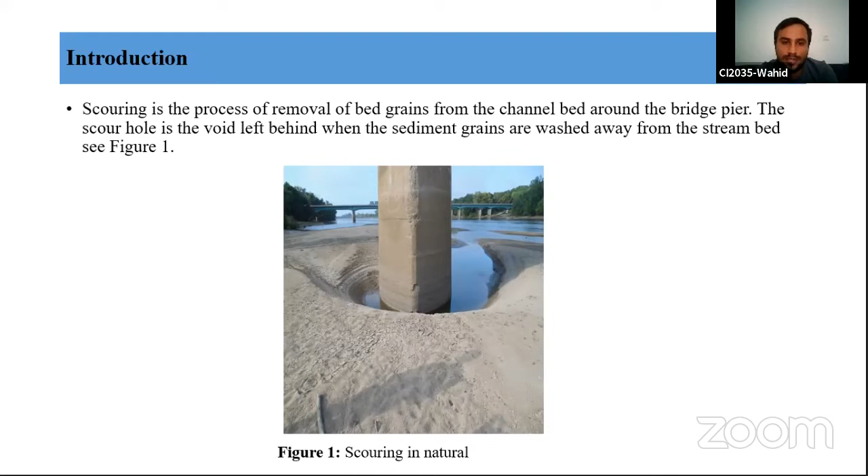Regarding the importance of scouring in civil engineering, according to Wardhana and Hadipriono in 2003, scouring is the most important cause of bridge failure in the United States of America. They state that 52.88% of bridge collapses are due to scouring, while earthquakes caused 3.38% of bridge failures.

In China, between 2007 and 2015, 40% of bridges failed because of local scouring. In New Zealand and Portugal, several cases of bridge failure were reported. In Turkey there are also some bridge failures, and bridge failure costs millions of dollars each year for renewal and reinstatement. The USA Federal Highway Administration claimed in 1978 that the failure of bridges and highways resulting from flood events

between 1964 and 1972 cost $100 million per event. The same occurs in other countries. Regarding bridge failure in Afghanistan, we know that bridge failures occur in developed countries as well, such as America, Turkey, China, and Portugal - in every country. And if we think about new developing countries, most of the bridges there fail as well.

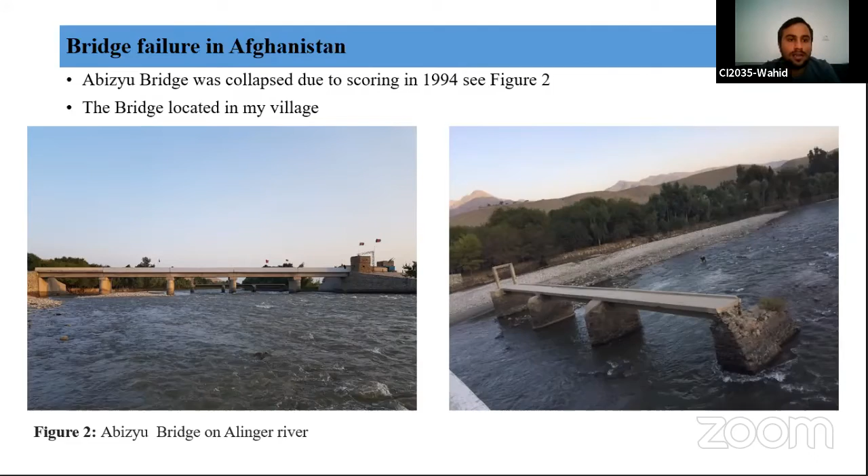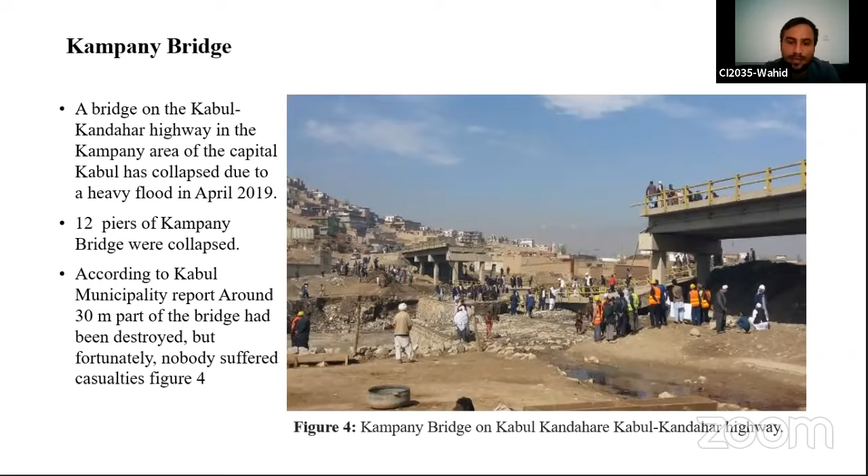Figure 1 shows a bridge in Laghman, Afghanistan, connected to a transportation network to another city, Jalalabad, Afghanistan. I saw that bridge myself.

That river is called Alishang River, which local people call the crease river. Let me talk about the properties of the river. It is so different from others; sometimes the flow is so high, coming much faster than other rivers.

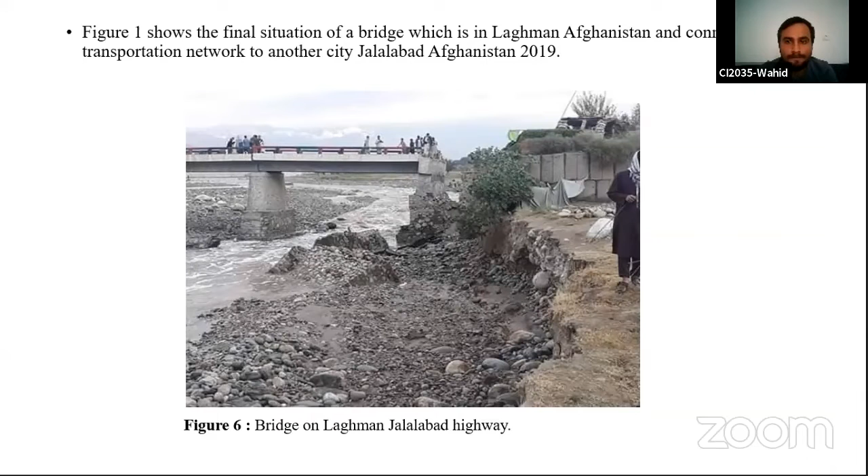This is the bridge in Kuner City. As we can see from the figure, the water removed the sediment around the bridge foundation, and that failure is called scouring. This is a newly built bridge, but the water removed the sediment, and the bridge is now under risk. The Ministry of Transportation claimed they are planning to rebuild or reconstruct that bridge. That bridge is over the Kunar River.

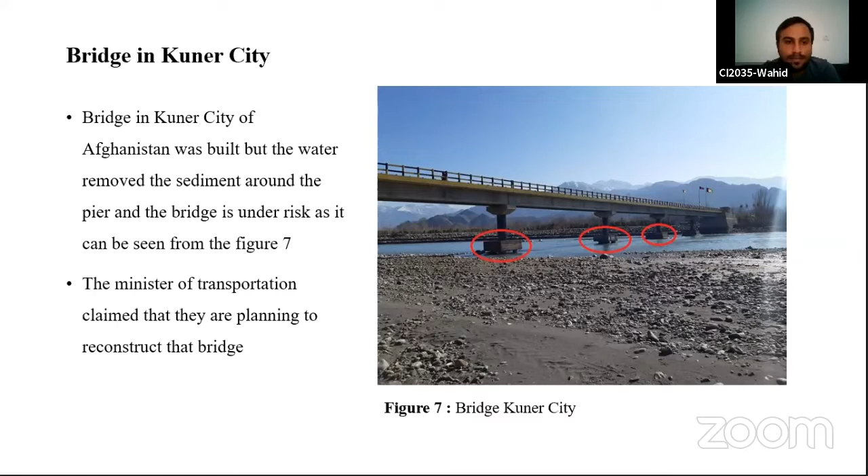In August 2020, the flood rate increased to a level more than usual. You can see the depth, which removed sediment entering from upstream due to the cross-sectional area of the bridge. Trees and sediment got stuck in the bridge and led the water to flow over the bridge, as we can see in the picture.

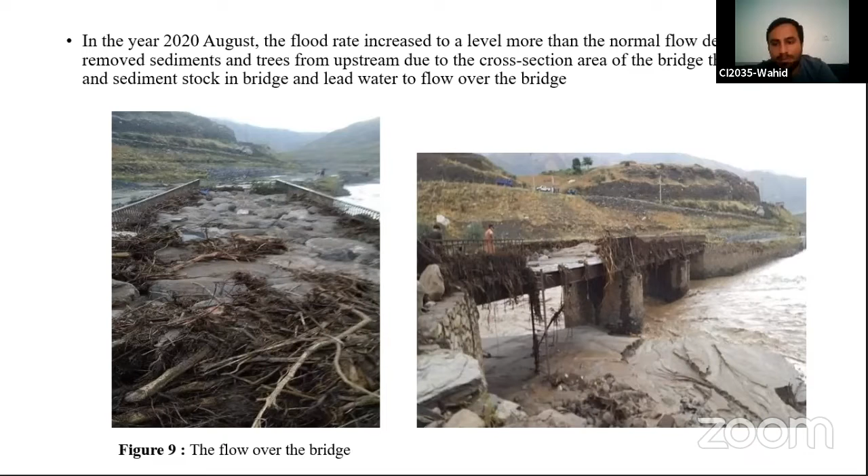The affected parameters on scouring: there are many affected parameters which affect scouring, and most of them are mentioned in this study, such as mean flow velocity, critical flow velocity, approach flow depth, flow intensity and viscosity, bed material, pier geometry, diameter, and time as well.

There are some existing equations in the literature which researchers have developed, but there are two types of equations: one is time-dependent and the other is time-independent. Laursen in 1958 investigated a relation to calculate the maximum scour depth for clear water conditions.

The equation is given below, where H is the flow depth and B is the pier diameter. Hancu investigated an equation to calculate the final scour depth, where FR is the Froude number. Jain and Fischer studied the maximum scour depth for a large Froude number in the laboratory and investigated the following equation. And Citale proposed an equilibrium scour depth equation for clear water conditions, and the equation is here.

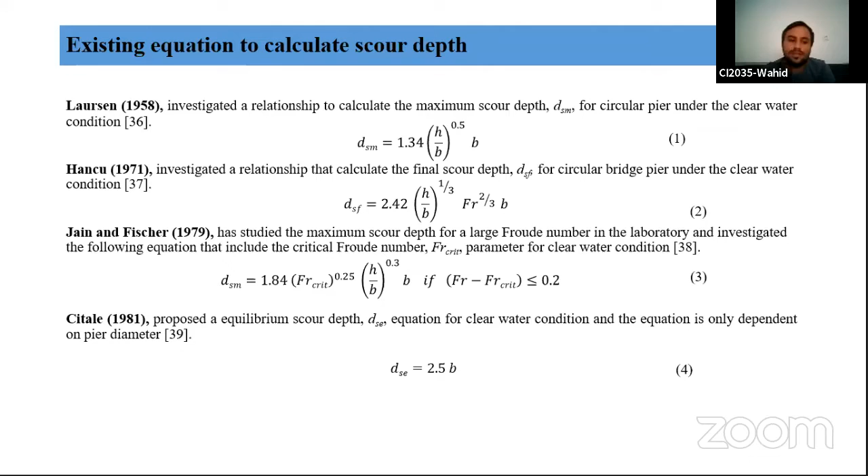Lanza suggests the following upper bounded predictor for equilibrium scour depth. Now for time-dependent equations, Franzetti et al. — these are the time-dependent equations.

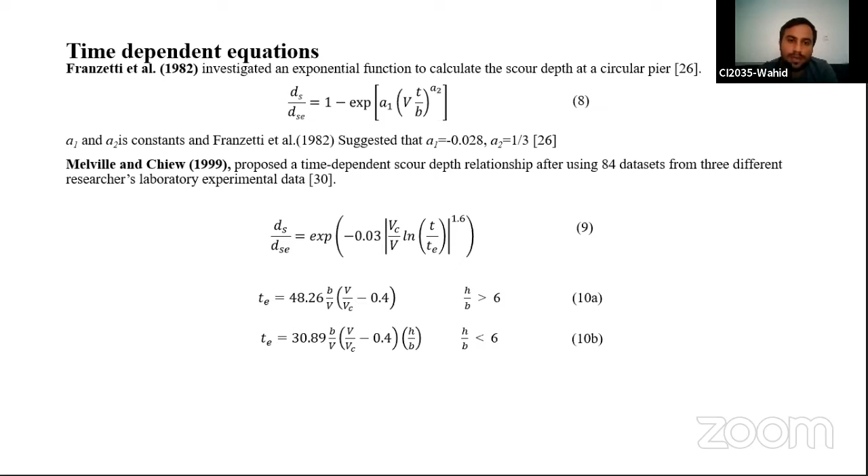Franzetti et al. investigated an exponential function to calculate the scour depth at a circular pier. Melville and Chiew also investigated an equation, and another equation to calculate the time to equilibrium, as we can see in the figure in the slide.

In conclusion, prevention of bridge foundation failure is the motivation to better understand both the scouring process and the predictions existing in literature. Under-prediction of scour depth may lead to bridge failure, while over-prediction usually leads to waste of resources. In Afghanistan, there is a strong need for revision in codal practice for estimation of scour depth. An equation is required for Afghanistan's conditions, which takes various factors into consideration for a robust estimation of the scour depth.

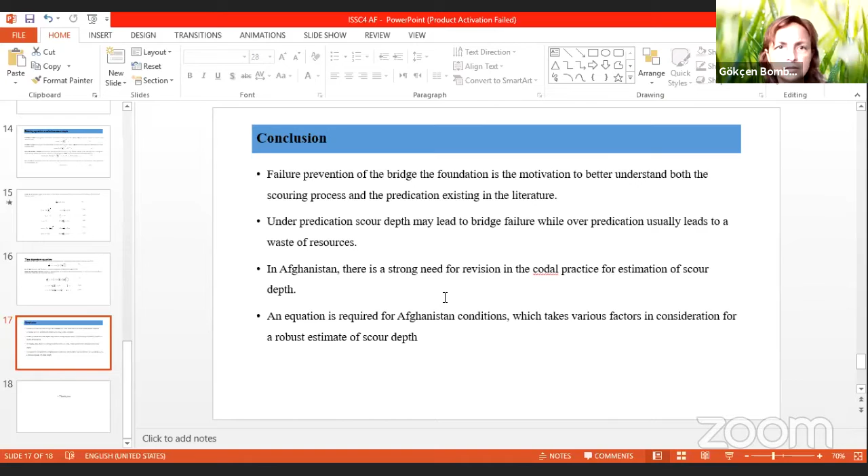Thank you, sir, and thank you to everybody. I have actually two questions. Your voice is not coming through. Can you hear me now? Now it's slow, so slow. Can you speak a little louder, please? Yes, how is it now?

Move from the room so I'm not going to disturb people. Can you tell me, is my voice coming through? I couldn't hear. Yes, your voice is coming. Can you repeat your question?

What is the main contribution of this work in science and technology? Because this is a big problem. From statistics, we have in the United States about 52% of collapsing bridges, and in other countries about 40%. That is a high amount of collapsing bridges due to scour. So if you could propose some solution to that in this work, it would be better, because what I've been seeing in this presentation is that you were just presenting the situation that already exists. We would like you to present something like what you propose as a solution to overcome this problem.

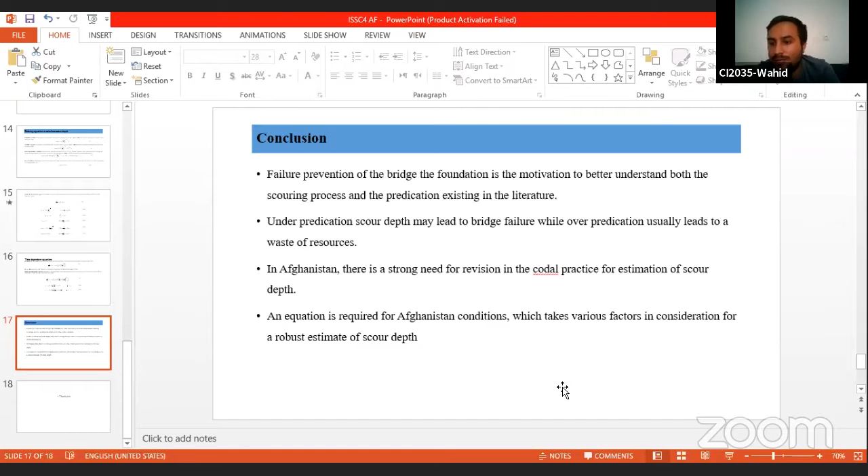For example, in Afghanistan, water or scouring is not the main problem for bridges. I will show you one bridge, located in my village, which the government newly developed, and after that it collapsed due to a bomb attack as well. So that is also a problem. To develop an equation, we need to do experimental work to find a solution, and most equations in the literature are used newly, but rivers are different. The properties of rivers for each country are different. In Afghanistan, no one has done work about this, but we are planning to do something and invent a new equation for that bridge.

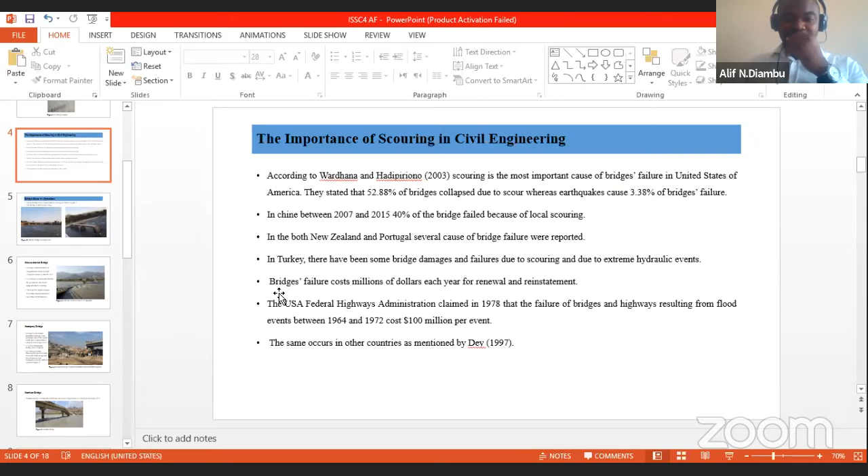Okay, thank you. I'd like to ask the second question quickly. If it depends on rivers, water is water and water is everywhere. Why should the equation depend on countries or rivers?

Yes, okay, we already have equations existing that other people made, but let me explain why you should use a new equation for that. The bed material and sediment characteristics are different. For example, for every country there is a different river, different sediment, different velocities, and also the pier geometry. In every country we can use one pier geometry, but the bed material and sediment are not the same. Also the viscosity effect, but not as much as the pier diameter—there are many factors in the river. One of my teachers, Cardoso, said that people go to the sky, but no one knows how to control the river. The river is something different. Many engineers have worked on that, but no one controls it. They only have some estimation.

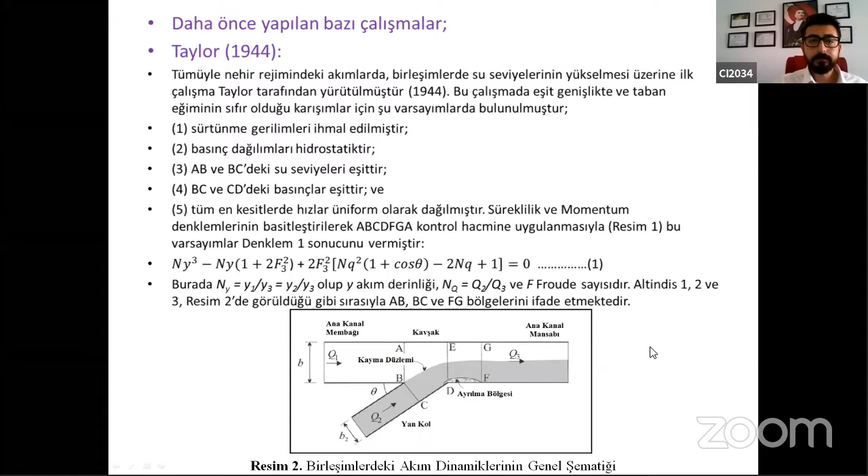Burada elde edilen sonuca göre Taylor 45 derece açıyla yapıyor zaten burada. Kuramsal modelin kendi varsayımını doğruluyor buradaki sonuca göre.

Daha sonra farklı çalışmalar da yapılıyor. Weber'in yapmış olduğu çalışma 30, 60 ve 90 derecelik açılarla çalışmalar yapıyor. Best 84 yılında, Hager 87'de ayrılma bölgelerinin etkilerini ortaya çıkarıyor. Daha sonra Biron, Best, Roy 66 yılında kanal tabanındaki uyumsuzluklar üzerine çalışmalar yapıyor.

Taylor tarafından tatbik edilen varsayımlara göre akım derinliği; Gurram, Karki, Hager, Huli ve Lee'ye göre onlar da akımların ana karakteristiğini inceliyorlar, Taylor'ın yapmış olduğu çalışmadan sonra.

Burada bir diğer önemli çalışma da Behlke ve Pritchett'in 66 yılında yapmış olduğu çalışma var. Dikdörtgen ve trapez enkesitli kanallarda yapılıyor bu, sel rejiminde yapılıyor, yani Froude sayısının birden büyük olduğu durumlar için. Derece olarak buradaki açıyı 15, 30, 45 olarak değişken veriyor. Taylor 45 derecede yapmıştı, Weber 30, 60, 90 derecelerde yapmıştı, Behlke de 15, 30, 45'te yapıyor.

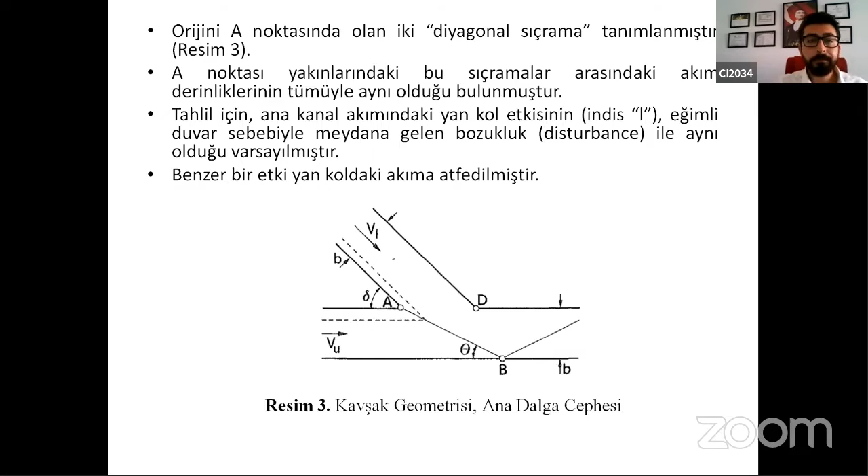Joy ve Thompson'ın 81 yılında yapmış olduğu bir çalışma var. Burada yine 90 derecelik açıya sahip 2 adet kanal üzerinde çalışma yapıyor. Yapmış olduğu çalışmada kinetik enerji akım düzeltme katsayısı olan alfanın, debinin artmasıyla ya da yan kolun genişliğinin azalmasıyla arttığını gözlemliyor. Bu katsayı kanal üzerindeki hız dağılımı üniform olmadığı için kullanılıyor. Joy da bunu kullanıyor.

Best'in 87 yılında yapmış olduğu bir çalışma var. Bu çalışmada ana kanal 0.12 metre, yan kol 0.08 metre genişliğinde. Açıyı 30 derece olarak veriyor Best. Modelini 3.5 metre uzunluğunda, genişliğini 30 santim olarak, devir daim kanalının uzunluğunu da 10 metre olarak veriyor. Uzun tutmasının sebebi akım derinliğini kontrol etmek amacıyla; kavşaktan mansaba yeterli mesafe kalması amacıyla yapıyor bunu.

Bu da Best'in yapmış olduğu çalışmanın görüntüsü. Burada giren debiler Q1 ana kanal debisi, Q2 yan kol debisi, çıkan debi Q3.

Burada belirttiği stagnation zone, yani durgunluk bölgesi; 1 numaralı bölgemiz durgunluk bölgesi. 2 numaralı bölge flow deflection, yani akımın sapması bölgesi. 3. bölgemiz flow separation zone, ayrılma bölgesi. 4. bölgemiz maksimum hıza ulaşan bölge. 5. bölgede artık akımın eski halini alması şeklinde.

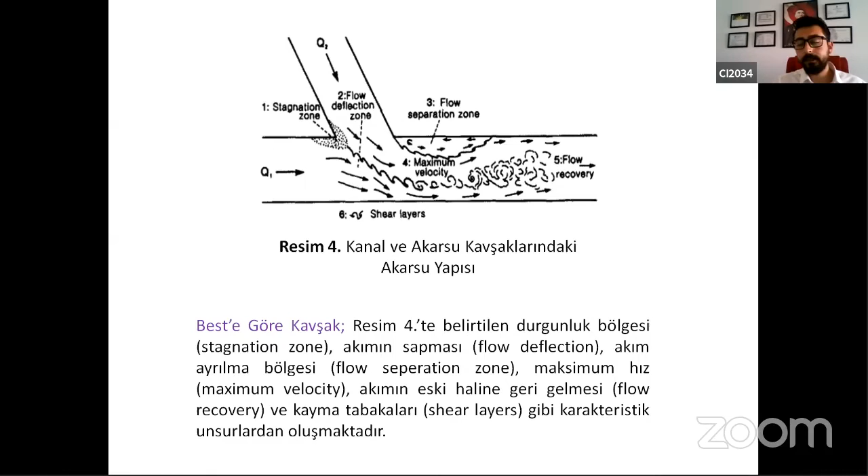Bunları şimdi açıklayacağım. Durgunluk bölgesinde basınç ve akım derinliği bu noktada artıyor, akım ve kayma gerilmesi azalıyor. Daha sonra yan kolla ana kanalın birleştiği bu noktada akım yönünde bir sapma oluyor, çünkü farklı yönlerde gelen akımlar mevcut.

Bu ayrılma bölgesinde kendi etrafında dönen çevrintiler meydana geliyor. Oklardan görebiliyoruz, düşey yöne doğru hızların önemli ölçüde belirginleştiğini görüyoruz. Daha sonra düşey hızlar bir nevi su perdesi oluşturuyor ve ana kanaldaki akımın bu bölgeye girmesini engelliyor.

Böylece karışma noktasının mansabındaki akımın aktığı kesit daha da daralıyor. Bu bölge daralıyor, daraldığı için daha büyük hızlara sebep oluyor; bu bölgede daha büyük hızları görebiliyoruz. Ana kanal ve yan koldaki debinin birleşmesiyle bir hız artışı, debi ve hız artışı meydana geliyor. Kesit daralmada olduğu için kesitsel ortalama hız da artıyor, hızların ve debilerin birleşmesiyle. Ayrıca burada hızların farklılığından dolayı da çevrintiler meydana geliyor.

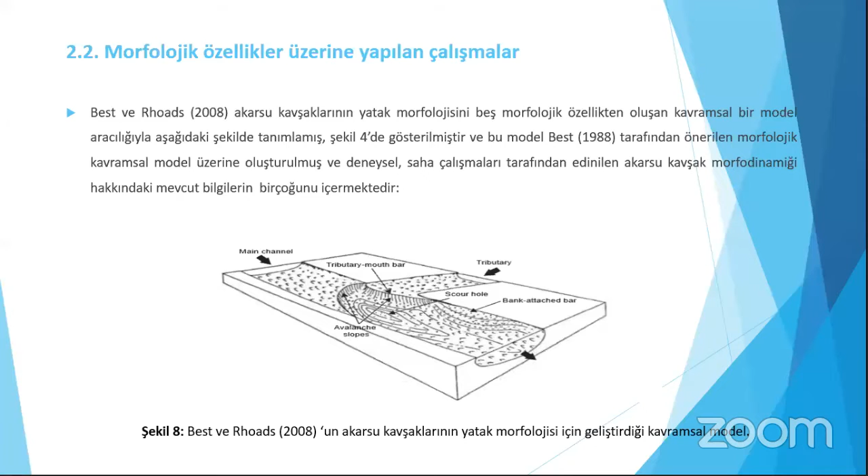Morfolojik özellikler üzerine yapılan çalışmalarda, Best ve Rhoads'un akarsu kavşaklarının yatak morfolojisi 5 morfolojik özellikten oluşan kavramsal bir model aracılığıyla şekil 4'te tanımlanmıştır. Bu model 1988 yılında Best tarafından önerilen morfolojik kavramsal model üzerine oluşturulmuş ve deneysel saha çalışmalarından edinilen akarsu kavşak morfodinamiği hakkındaki mevcut bilgilerin birçoğunu içermektedir.

Best'in 1988 yılındaki morfolojik modeli, 5 kavşak açısı (15, 45, 70, 90 ve 105 derece) ve 3 debi oranı (0.53, 1.02 ve 1.53) test edildiği laboratuvar deneylerine dayanmaktadır. Mosley tarafından yapılan çalışmada ise farklı debi oranları (0.33 ile 1 arasında) ve kavşak açıları (15 ile 90 derece arasında) simetrik ve asimetrik akarsu kavşaklarında test edilmiştir.

Son 2 dakika diyebilir miyiz?

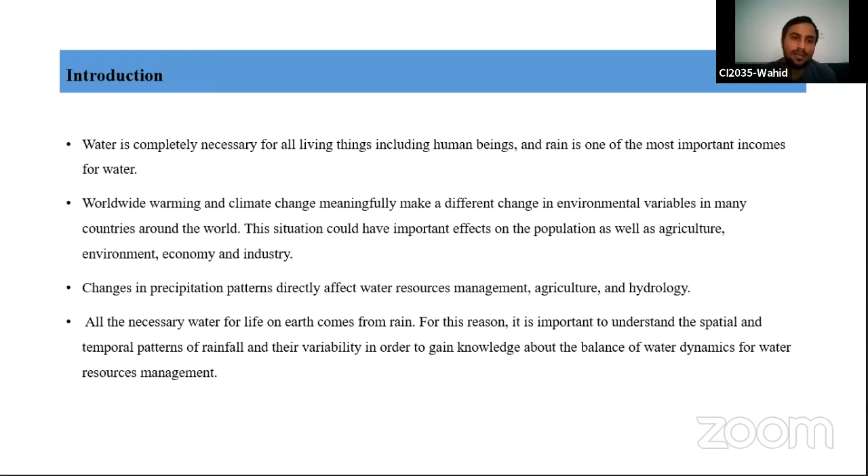As we know, water is really necessary for humans, and rain is one of the most important resources for water, and because of that rain, the climate is also changing. For example, water directly affects humans, agriculture, and industry, in everything. There are many researchers who have worked around the globe and also in Turkey to calculate rainfall and runoff analysis, and also mean temperature. Some of them are foreign and some are Turks, and these are the people who work on that topic. I'm going to go a little bit faster in order to not spend our time.

In study area and data, the data of the daily rainfall and monthly mean air temperature recorded at the Black Sea is used in this study. The name of the gauging station is Hopa and Artvin. Table 1 shows the basic statistics of monthly total rainfall and monthly mean air temperature for the period 1975 to 2006. There is no missing data in all of the rainfall and temperature time series.

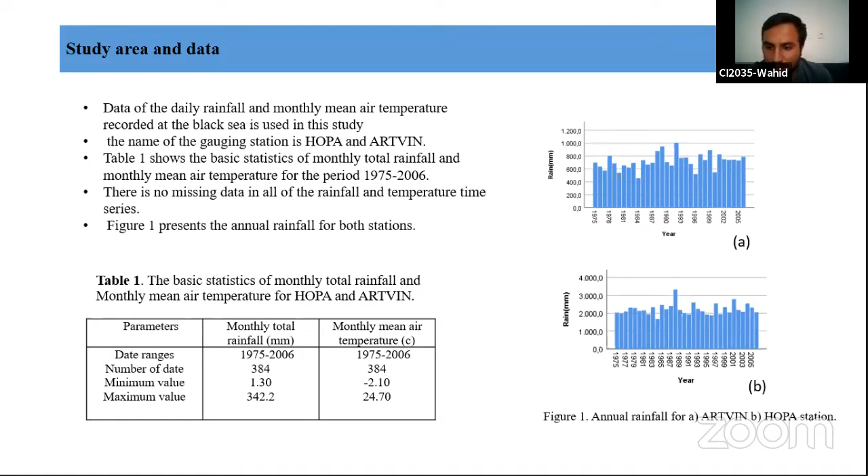From the analysis of temperature data series, it can be decided that the temperature characteristic is changing, especially in Artvin. The change is not that much. In Hopa Station, the temperature is changing continuously over all the years, and there is a decrease in temperature for the last 6 years.

Methodology: in this study, the daily precipitation and mean air temperature data were collected in the Black Sea region. Two meteorological stations were used for a period of 1975 to 2006. Daily precipitation and monthly mean air temperature data were first calculated as monthly and annual values. For the precipitation data set, the seasonal amount was calculated by summing the precipitation quantity from the months.

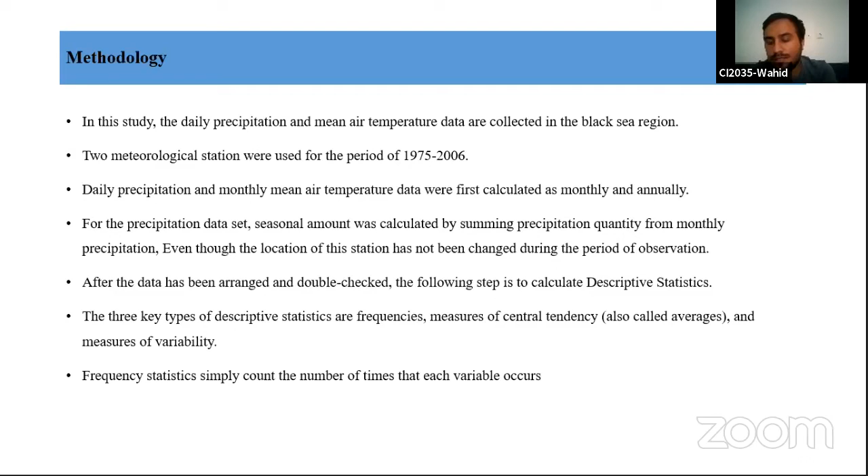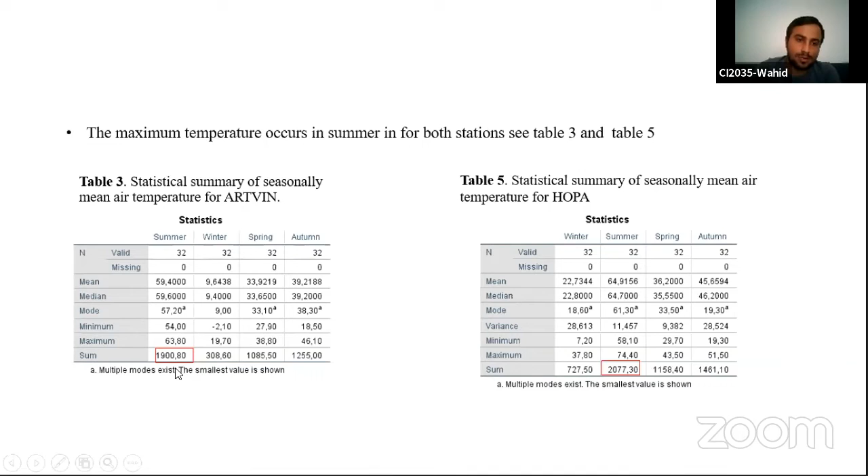In conclusion, in this study, precipitation and temperature data from 1975 to 2006 were used to statistically identify annual and monthly characteristics in the Black Sea region. From the analysis of the annual, seasonal, and monthly rainfall data series, it can be determined that the precipitation characteristics of the area are changing, even though the results of the two different stations differ from each other.

The maximum precipitation occurs in winter, but the maximum temperature occurs in summer, in Artvin station. It's different for the Hopa Station: the maximum precipitation occurs in autumn, but the maximum temperature occurs in summer. Summer, spring, and autumn are the homogeneous seasons in terms of temperature.

From the analysis of the data series, it can be decided that the temperature characteristics of the area are changing. In Hopa Station, the temperature is changing continuously over all the years from 1975 to 2006, and moreover, there is a slight decrease in temperature for the last 6 years.

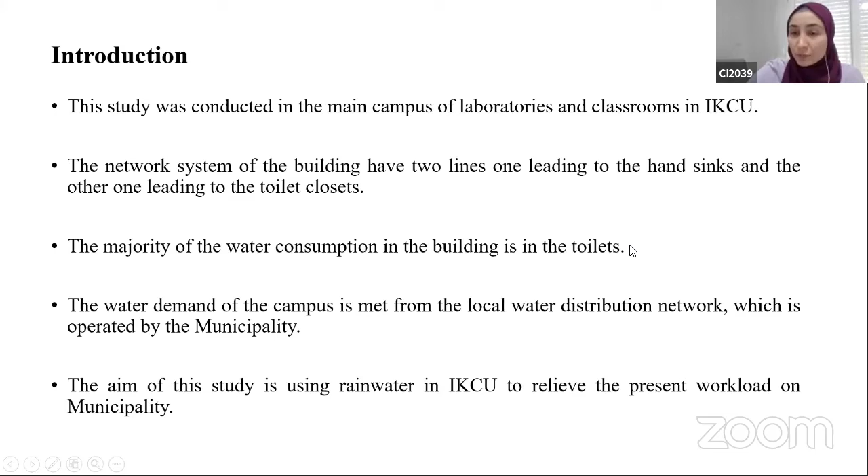By examination, we know most of the water consumption in the building is in the toilets. The water demand of the campus is met from the local water distribution network operated by the municipality. The main aim of this study is using rainwater in İzmir Katip Çelebi to relieve the present workload on the university and municipality.

The methodology of this study: rainwater harvesting potential means the amount that can be effectively harvested. There are some factors affecting the rainwater harvesting potential, like precipitation and rainfall, including quantity and pattern, and catchment area characteristics, meaning the catchment area and the runoff coefficient.

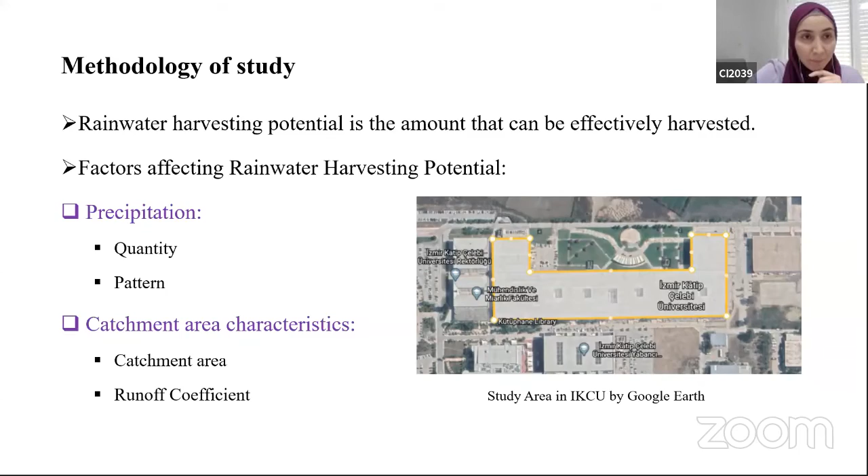This study area is shown on the right side via Google Earth, the studied building in İzmir. For precipitation quantity, according to academic sources, average rainfall that exceeds 300 millimeters is suitable for applying rainwater collection systems, and İzmir has a typical Mediterranean climate.

For the pattern, we mean the number of annual rainy days, because it also influences rainwater harvesting systems. If the dry period is too long, big storage tanks would be needed to store the rainwater. In İzmir, more than 50% of the annual rainfall falls in winter.

For the average monthly rainy days in İzmir, obtained from the sources, the highest is about 12 days in December, and only about one day in July. It's very low, of course.

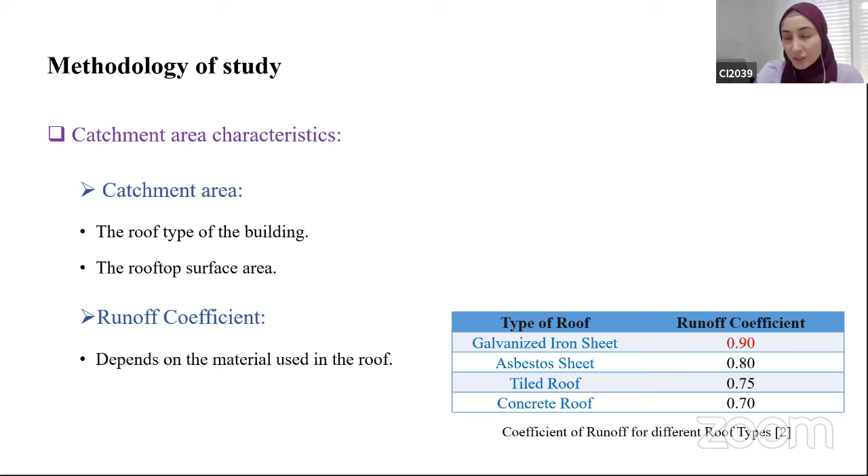Catchment area calculation for our study: the rooftop of the studied building is metal roofing, so the runoff coefficient is 0.9, and the roof type of the studied building is a pitch roof.

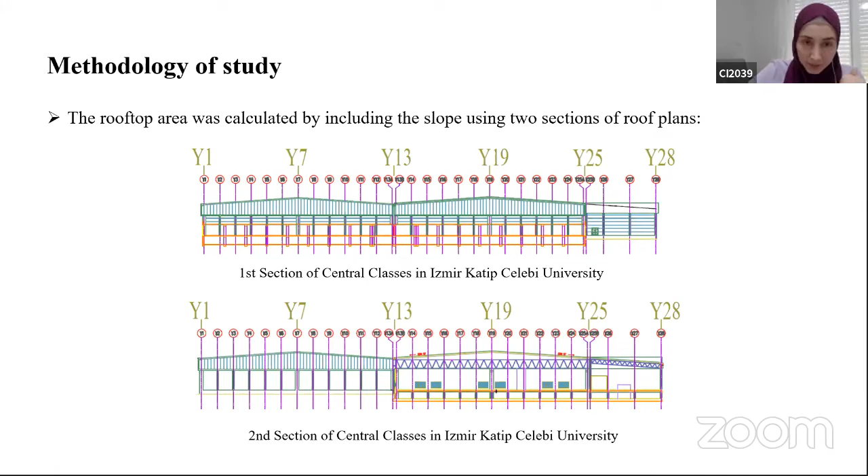If we look at the studied building from the left side and the right side, we can see it is like a lot of triangles on both sides. Mathematically, we can find all the dimensions to get the harvestable rainwater.

For this reason, we first calculated the area of the rooftop of the building for the area used to determine harvestable rainwater.

Now the volume of harvestable rainwater from the rooftop of the campus is calculated using the Gould and Nissen-Petersen formula. This formula gives us the rainwater harvesting potential, which equals multiplying three variables: catchment area in meters squared, as calculated previously, and monthly rainfall in millimeters, which we obtain from meteorology.

And the last one, runoff coefficient, which is 0.9, because our rooftop is metal. By substitution, we can get this volume about

17,000 metric cube. To know the details for this one, we can see this table. In this table, we have, for every month, the catchment area, which we calculated, and the average monthly rainfall, which we got from the meteorology, and the runoff coefficient as to the material of the rooftop of the building.

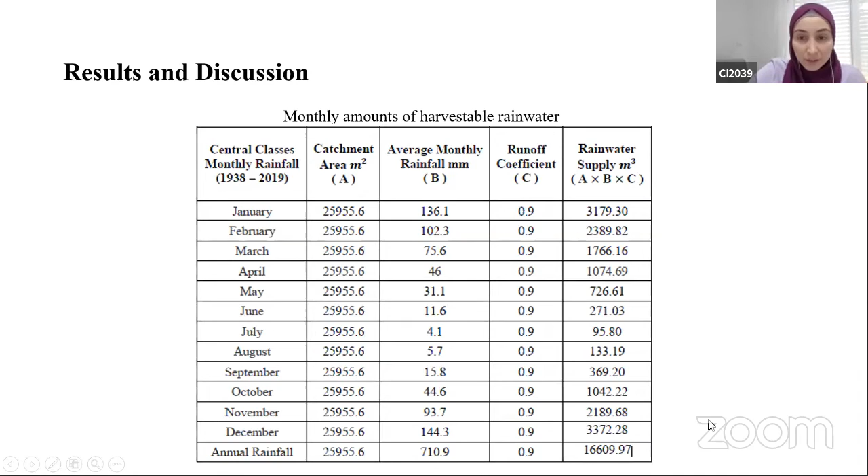For this reason, by the last formula, we can determine the maximum rainwater supply, which we get at about 17,000 metric cubic. As we know, the main uses of water in the universities are only for

non-potable purposes, such as toilet flushing and irrigation. For this reason, no need for any treatment, only simple filtration is enough. According to the data, the amount of harvestable rainwater to be collected may meet the use of water in toilet flushing and also in irrigation, but we can determine that by estimating the water demand, by installing flow meters to

determine exactly the feasibility of utilizing the harvested water. The intended purpose of this study is determining the rainwater harvesting potential in Izmir University. The implementation of these systems in the university will help to contribute to reducing the current pressure on the university budget, utilize the water resources more efficiently by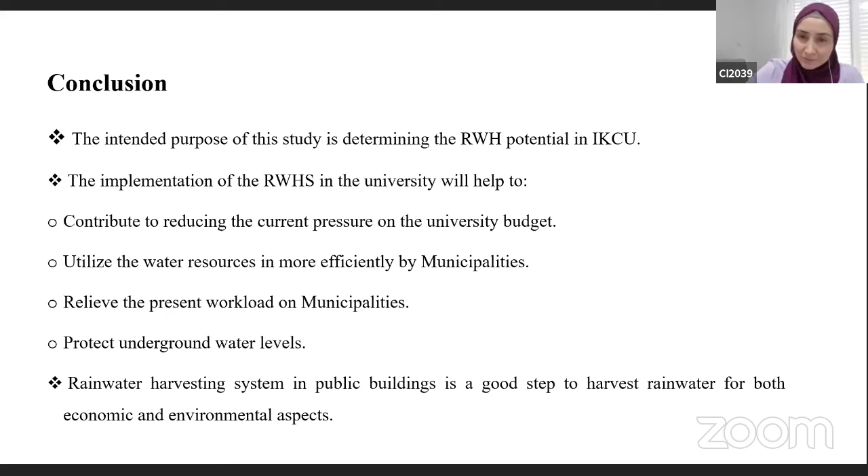municipalities, relieve the present workload on municipalities, and protect underground water levels and large amounts of water. Rainwater harvesting system in public buildings is a good step to harvest rainwater for both economic and environmental aspects. This is my references, and thank you very much.

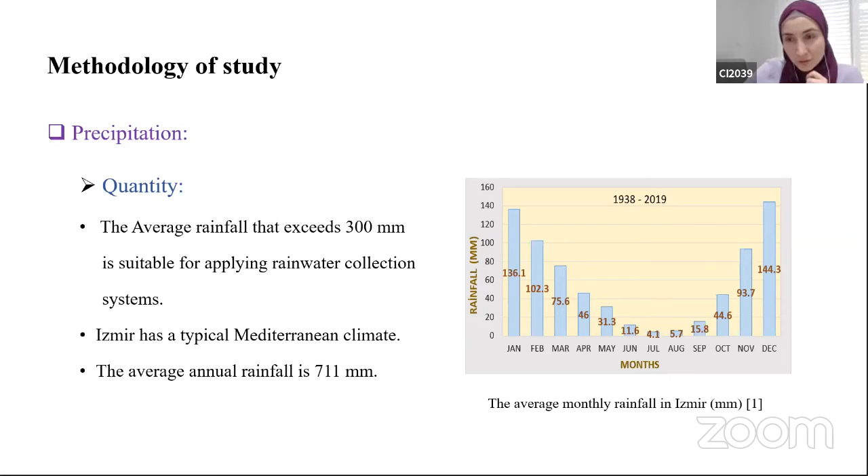This average is only for the December month. No, yes, but I know the average, even for all of them, it's about 700 millimeters. Oh, okay, any question? It's okay. Okay, thank you very much, Alif.

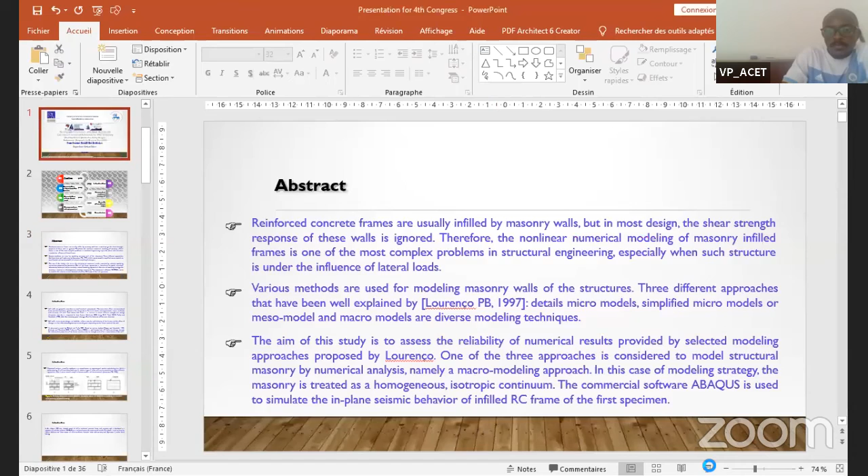Okay. Hello everyone. Thank you for this moment that you give me the opportunity to defend this topic, which is earthquake resilience of infilled reinforced concrete frame with innovative wall solution. So this topic is about the new type of masonry that we're going to find out if it's going to match with the expectation for everybody, because in this

year we have noticed that some of the walls have some problems to sustain the seismic load, because masonry walls were constructed to sustain the vertical load. When it comes to the seismic load, it presents some weaknesses. That's why our topic matches with this area.

So first of all, I'm going to make some description of the experimental test specimens which have been done before. So this topic, my work gets some results from the experimental tests that have been done before. So we use some results to conduct our

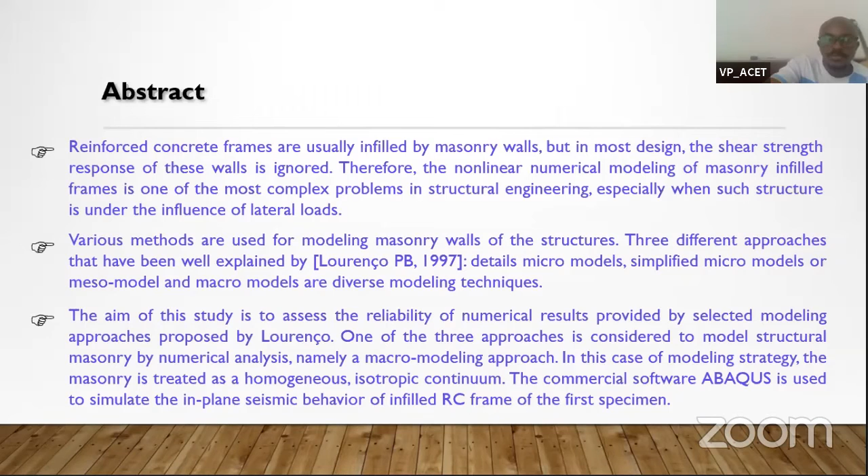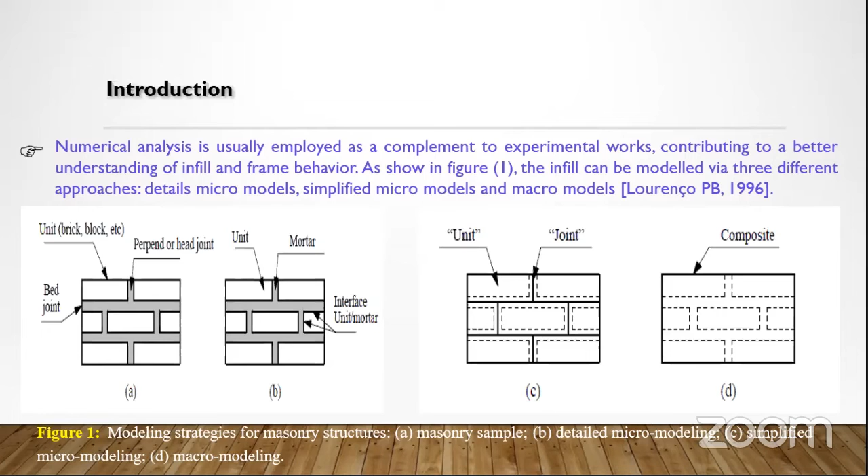This is the type of masonry that Lourenço proposed: the micro model. Here we have a meso model, and here we have a macro model. In the micro model, there is unit and bed joint mortar designed element by element, but in the macro model, all elements are designed together. Let's go to the description of the specimen.

This was the test specimen that was conducted by Monsieur, who I have to underline is my supervisor. He conducted this experimental setup where there was a frame, a concrete frame, with infill wall.

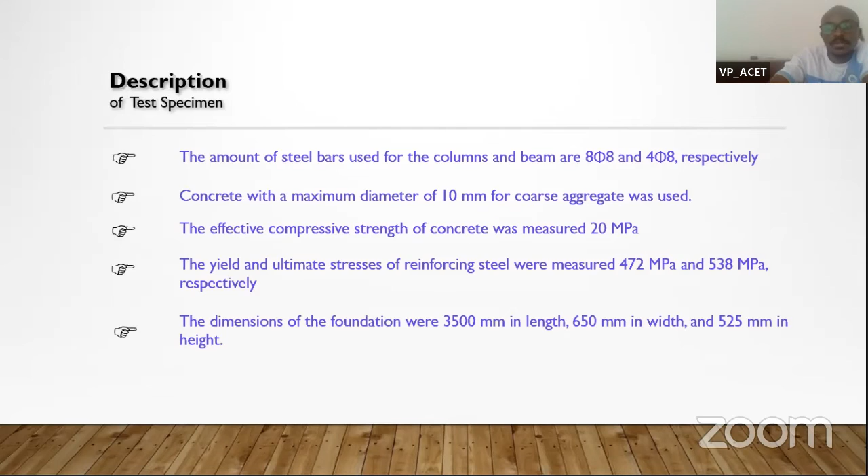This wall is made of standard brick, and as we can see, there are all the parameters included, like the amount of steel bar used for the column and beam, which are 8 and 4 respectively, with concrete with maximum diameter of 10 millimeters. The effective compressive strength of concrete was measured at 20 megapascal. The ultimate stress of reinforced steel was measured at 472 and 538 megapascal. The dimension of the foundation, as we can see here, those are the parameters that have been involved in the experimental campaign.

What was the experimental result? We noticed that for the bare frame, the first crack related to flexure behavior was observed at a drift of 0.28%, where the applied load corresponding to this drift was measured to be 35.8 kilonewton. For the standard brick infill, the first damage was observed when the infill wall separated from the beam at a certain drift level, and the applied load at this drift level was 96.3 kilonewton. The first flexure crack was observed at a drift of 0.34%, with the applied load measured at this drift being 116.2 kilonewton.

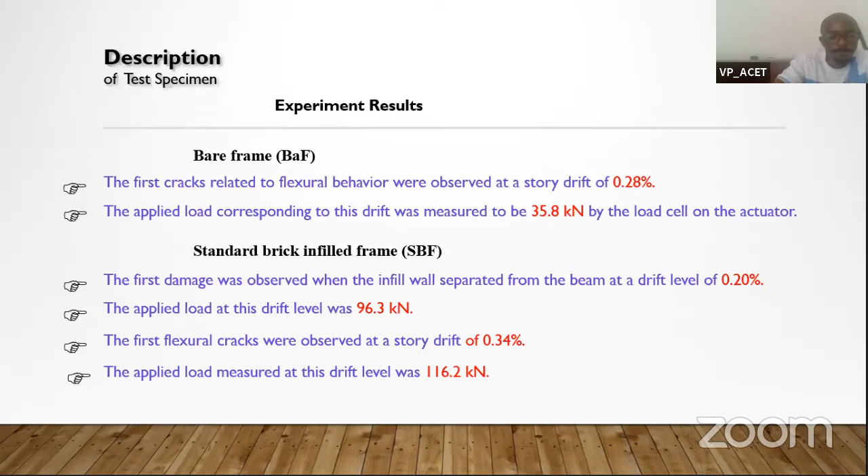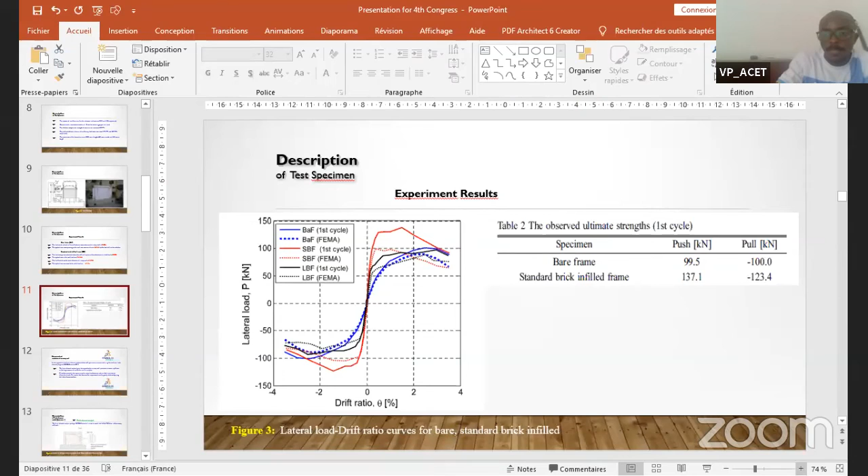Here we have the graph of lateral load versus drift ratio. As we can see from the table, there was the push and the pull for the bare frame and the standard brick infill frame.

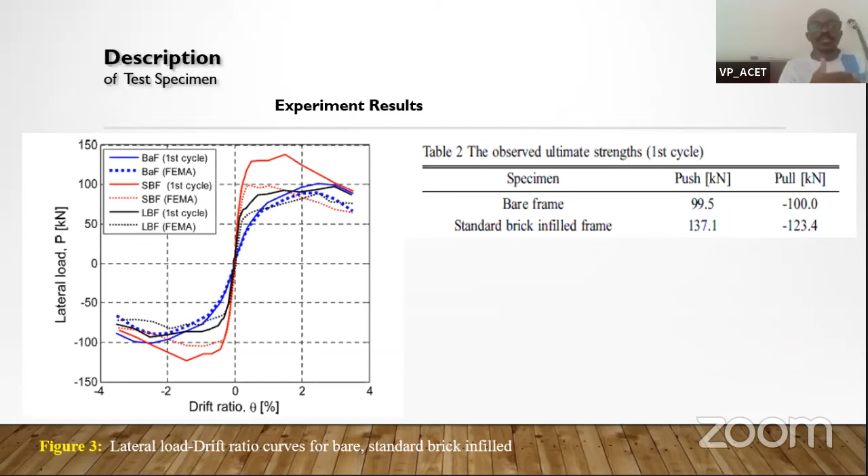So what we're going to do now is compare the experimental result and the analysis. For this, we use Abaqus to conduct our analysis campaign.

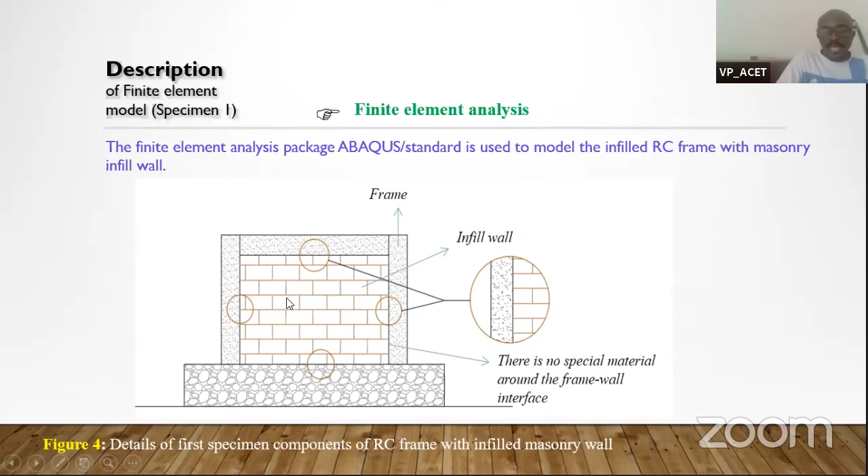Our specimen is constructed as follows: we have a bare reinforced concrete frame and an infill wall made of standard brick, with no special material between the connection of the reinforced frame and the wall. As you can see in the model characterization, we have concrete beam, masonry, and solid elements. All of these elements are designed as one element in Abaqus.

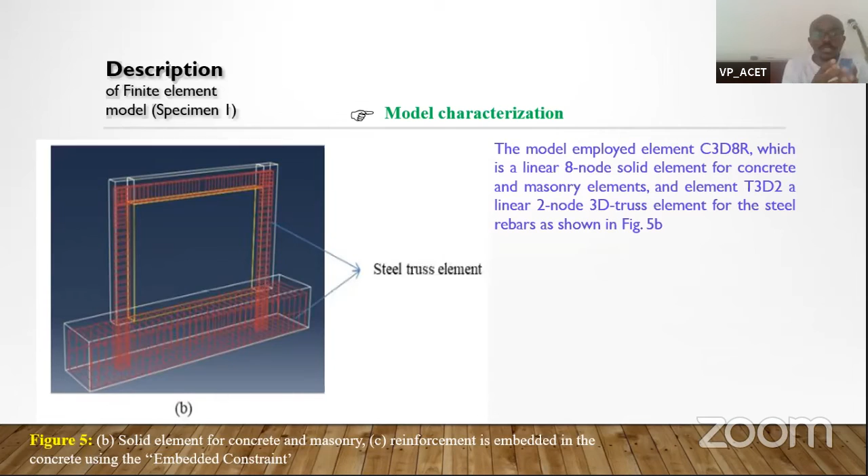In this figure, we got the solid elements for concrete and masonry. These elements are embedded together to allow a good bond between those elements. It's the same in this figure, showing a good connection or bond between all of the elements, like concrete and steel.

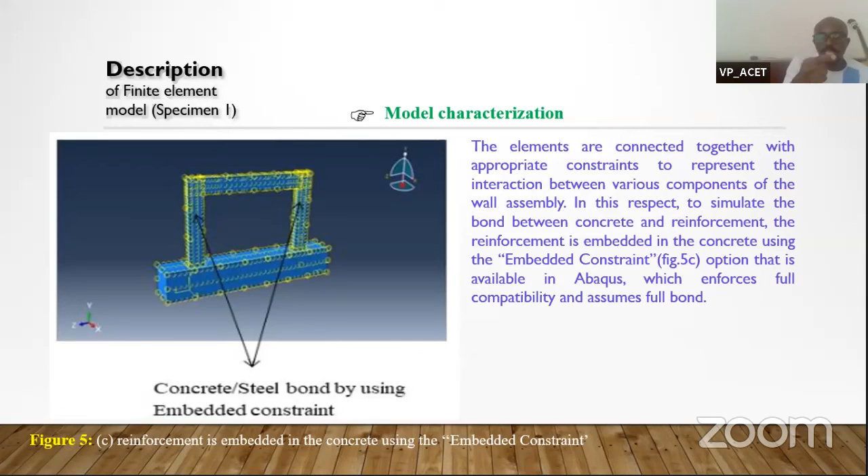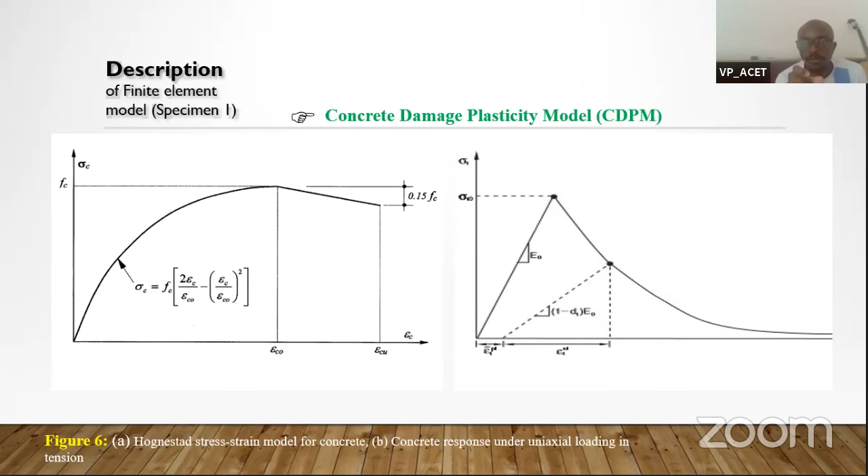So as I underlined before, the interaction between concrete and masonry: there is no special material between them. In Abaqus, we have defined a parameter to maintain that they must not have connection between them. For that we have described hard contacts, and we define a friction coefficient of 0.5.

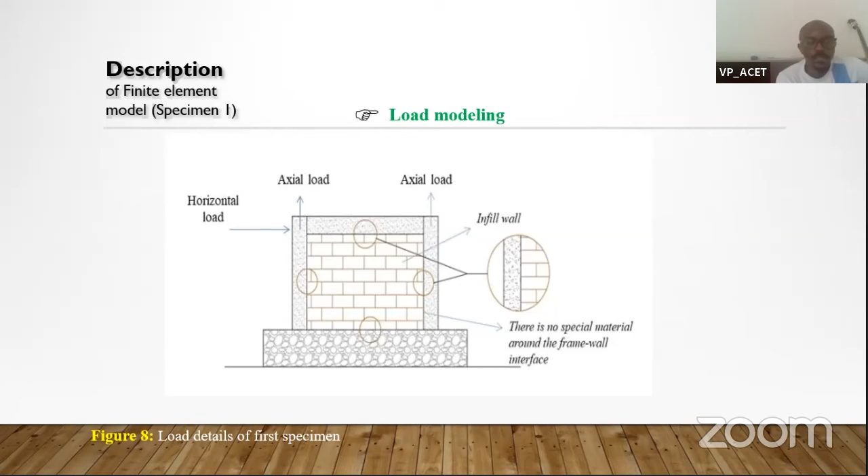For concrete, the Poisson ratio was 0.2, compression strength 20 megapascal, modulus of elasticity, density also. And for reinforcement steel, the Poisson ratio was 0.3, yield stress 472 megapascal, modulus of elasticity 214000 megapascal. All of this material property is taken into account in Abaqus in order to conduct our analysis.

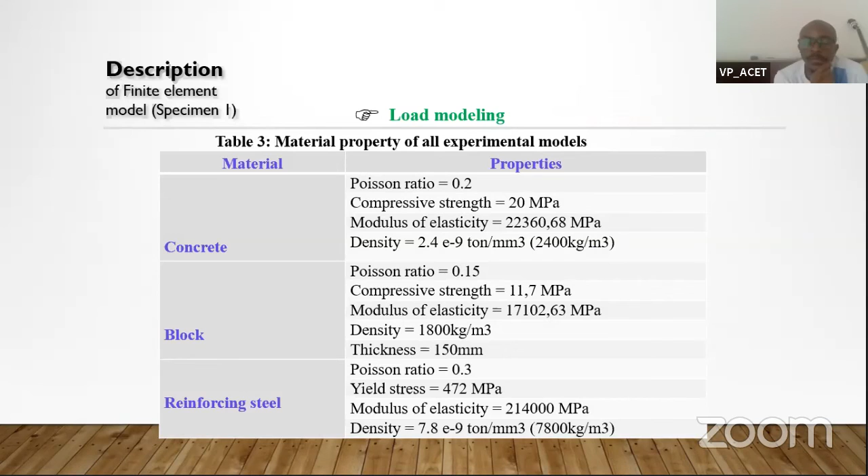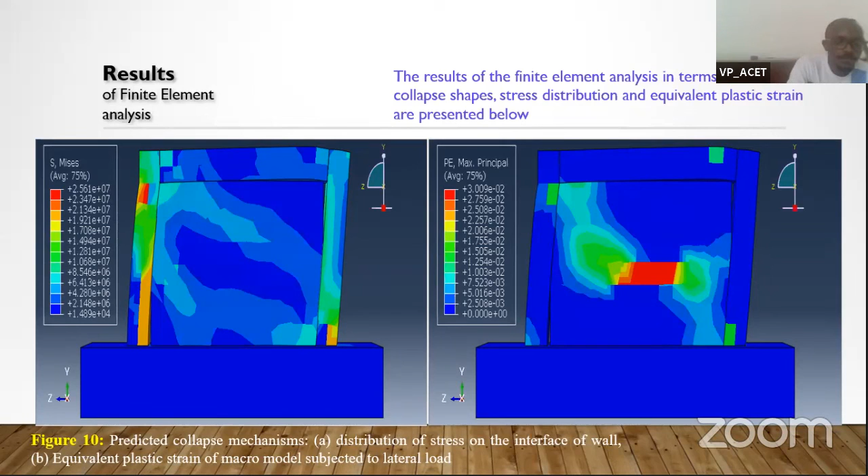In this result, we notice that in the upper left and right corners, the infill detached from the reinforced concrete at a lateral load of 353.64 kilonewton, which corresponds to a drift of 2.2%.

It should be noticed that the failure mode of the numerical model is compatible with the experimental results in terms of damages, because we can see it in the corner here and also here.

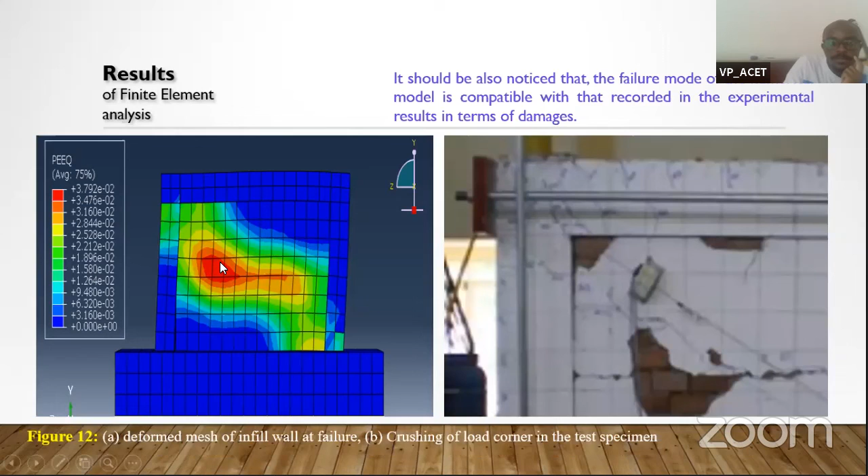In the comparison with the experimental test, when we get to a drift of 1.19% and 1.0% drift ratio, we got the same similarity as shown in the experimental campaign, also in the analysis methodology, in diagonal or horizontal cracking.

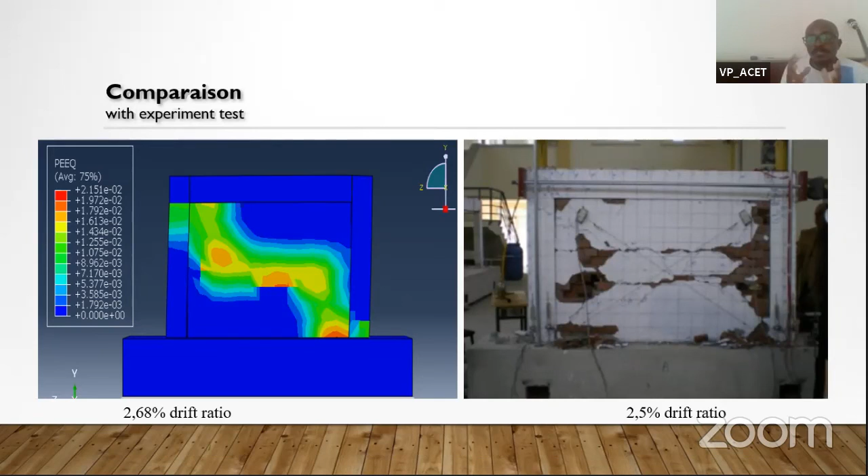Also at a drift of 2.68%, we have this same kind of similarity in terms of damages. It's the same case at a drift of 3.6% and 3.5%. So our expectations in terms of using the software match the expectations in terms of damages.

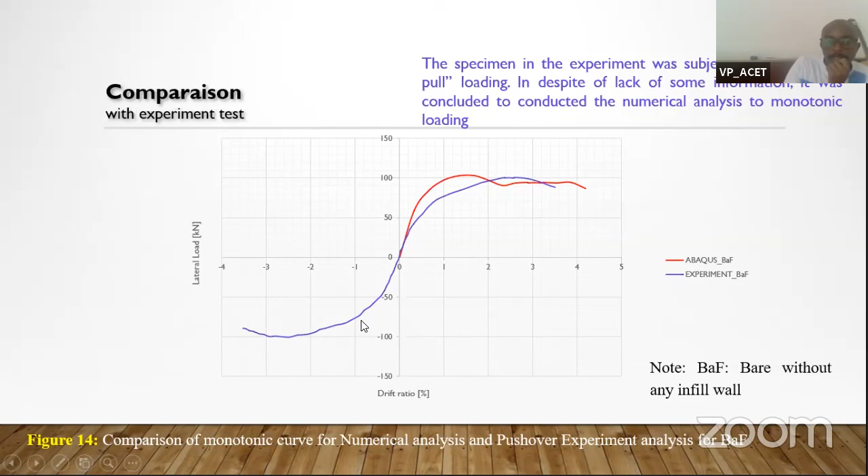So we can see in the graph here, for the BaF, the first crack point. It's similar, almost the same.

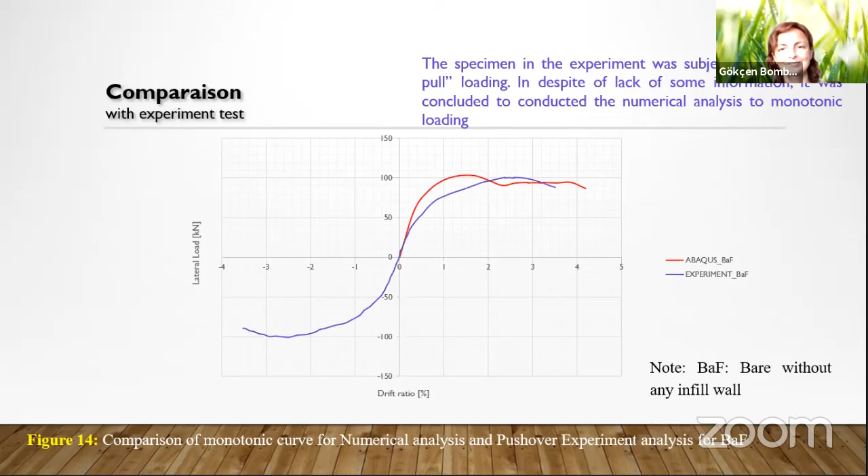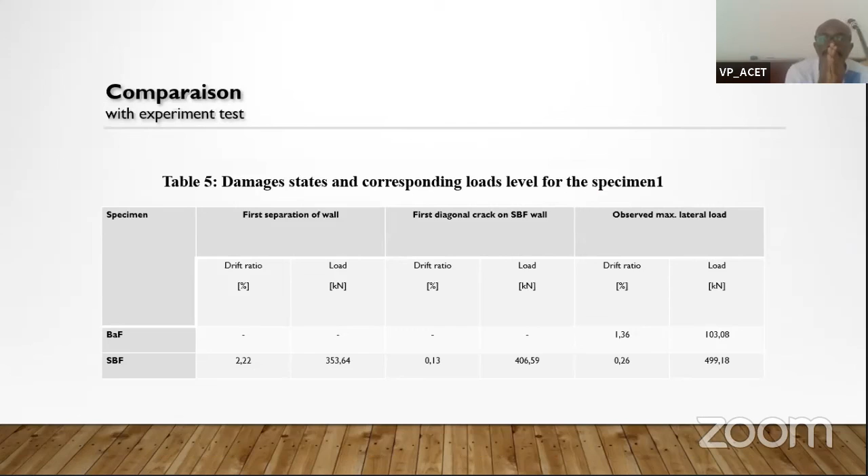In this table, we show the comparison between the experimental and the analysis method in terms of damages, as I explained before.

So for the conclusion, the force displacement curve shows that the method of using finite element methods to simulate the behavior is very good. It can show what the experiment tries to demonstrate, or can have some problems.

And for the rest of the study, we will use Dyna to be much more accurate, or to get the same results as the experimental campaign. In this order, we will go on to do another experimental study.